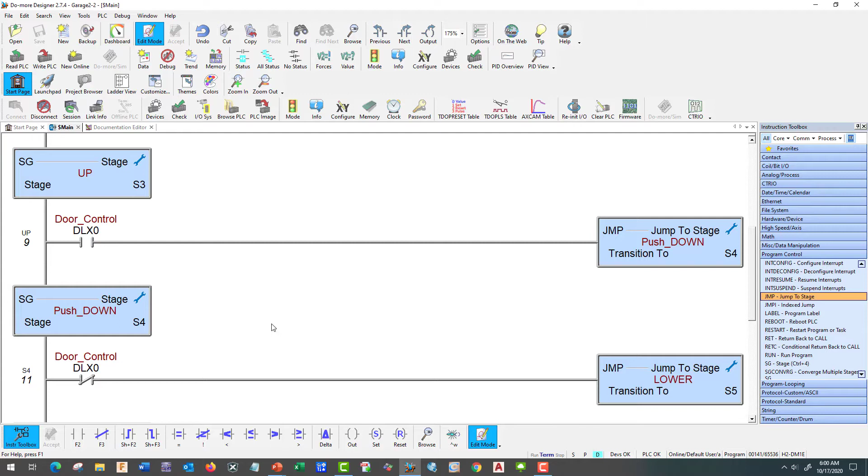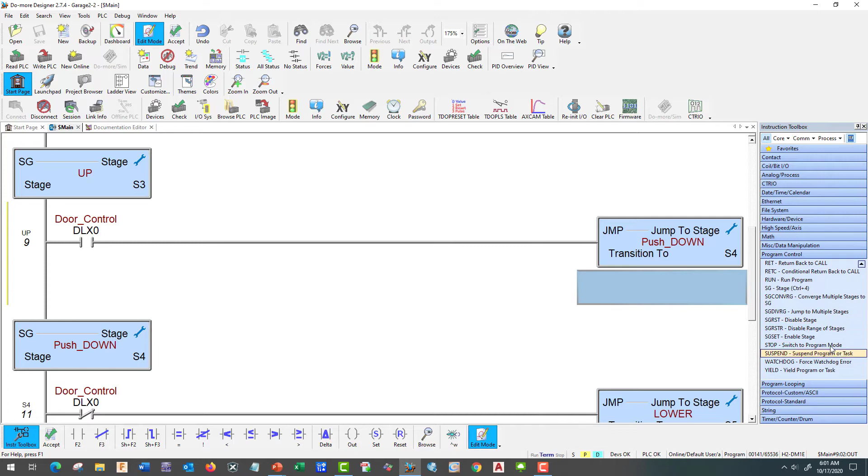And we want to add a safety light. So we're going to go right under here. So let's go here and we're going to go to Edit, Insert, and let's send a row after the cursor. So let's do an enable stage because we want this to stay on until we tell it otherwise. Enable stage, here we go, and we're going to enable stage 6, which should be our light, and it is. Control up, and that's done.

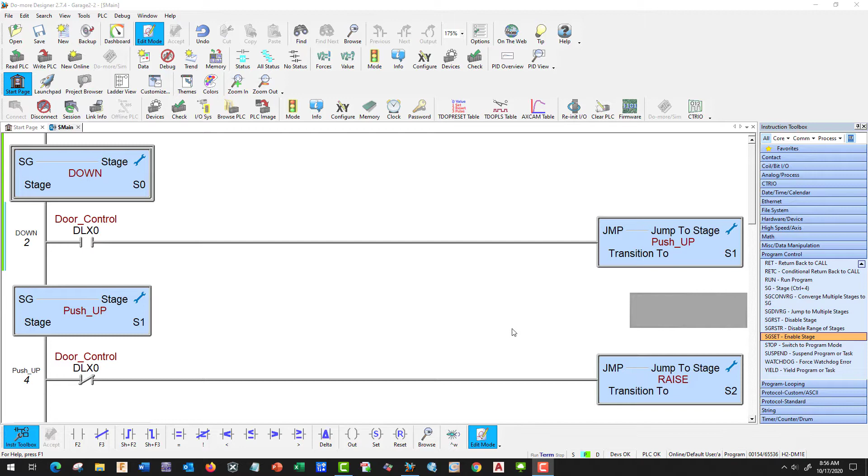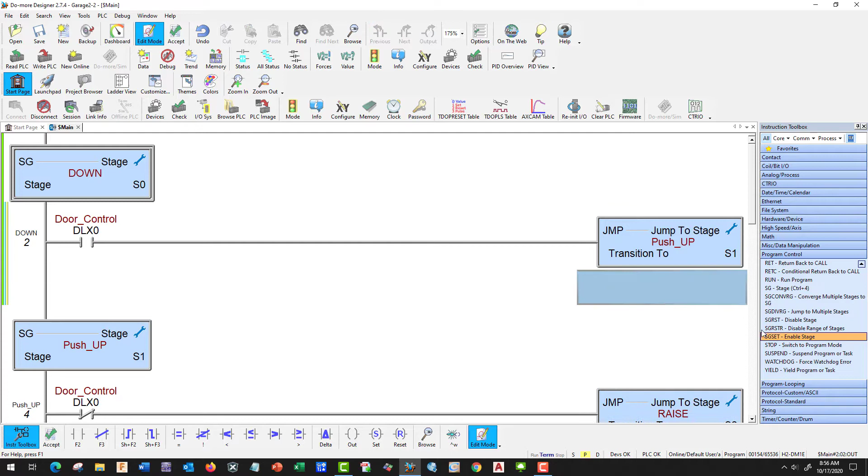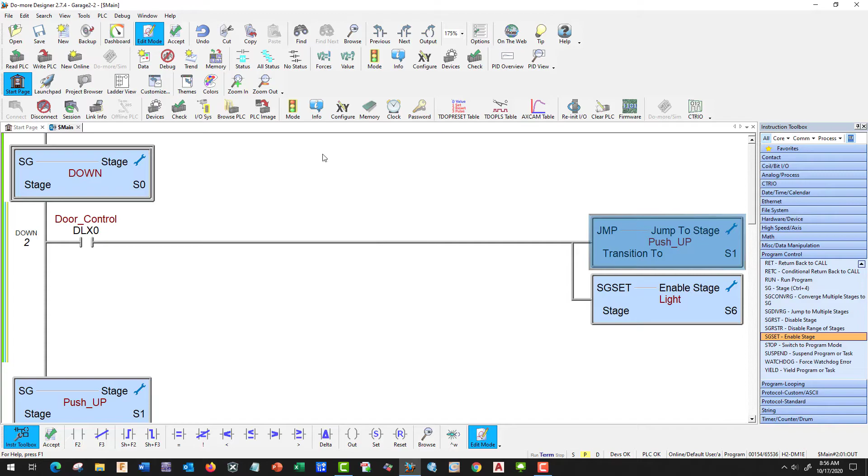Okay, let's go ahead and add our safety light to our down. So we're going to edit, insert, row after cursor. And we're going to do an enable stage, and we're going to enable 6. So we're going to enable our light. And control up, and that looks good. We don't need to add a stage 6 because once we put this in, it automatically included it.

And let's go ahead and turn our light on. That's going to be a DLY3 safety lamp. Good. And again, we have a powered rail as long as it's under the stage, so we don't need another control.

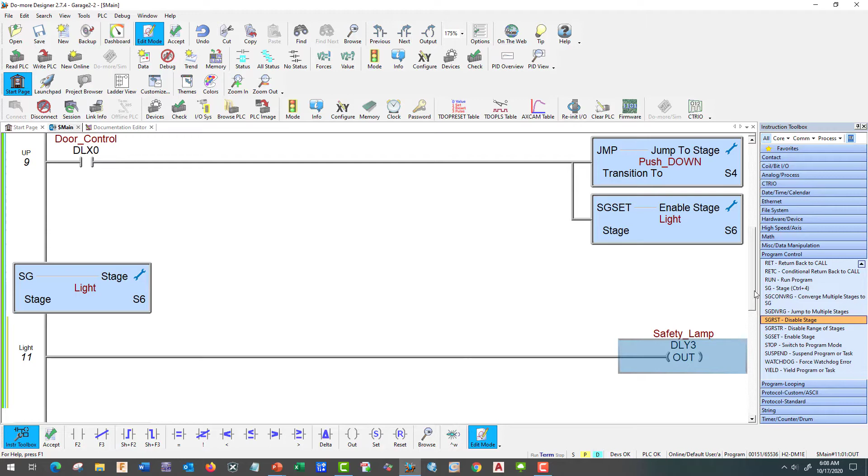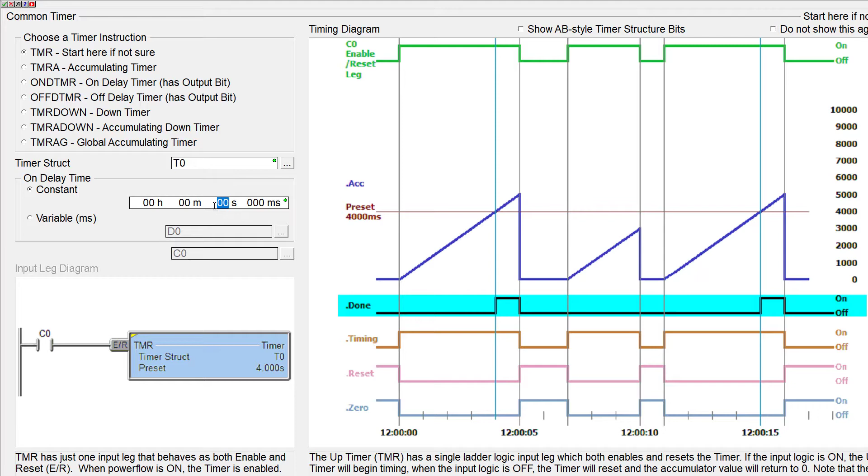And we're going to add a timer, so we're going to need to edit, insert, row after. We're going to put a timer in there, so let's go down to timer counter drum. And we're going to call this T0, and it says 20 seconds, but we're going to do it 5 so we don't have to wait so long. Good. And let's do a control up.

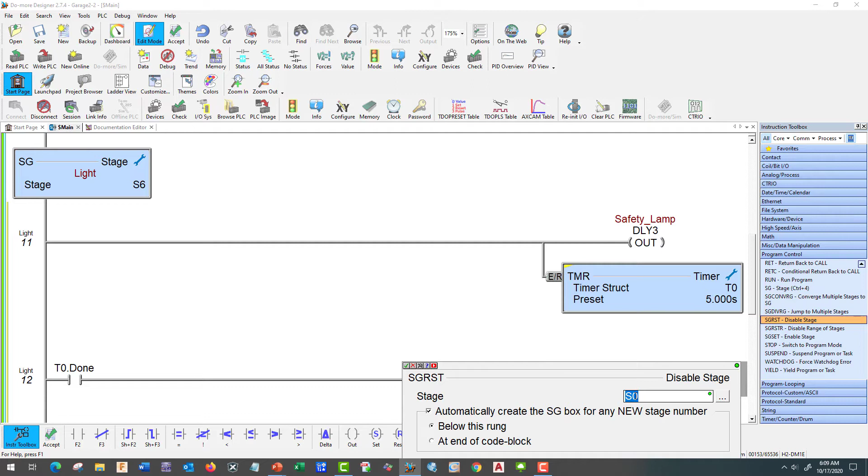And let's go down. Let's insert a rung. Edit, insert, rung, after cursor. Good. And we're going to put a T0 done here, so when our timer times out, done, we are going to turn off our light. So we're going to do a disable, so we need to go back on program control, and we're going to disable stage, reset, and we're going to reset S6. So after 5 seconds, it's going to turn our light off. And that looks like it.

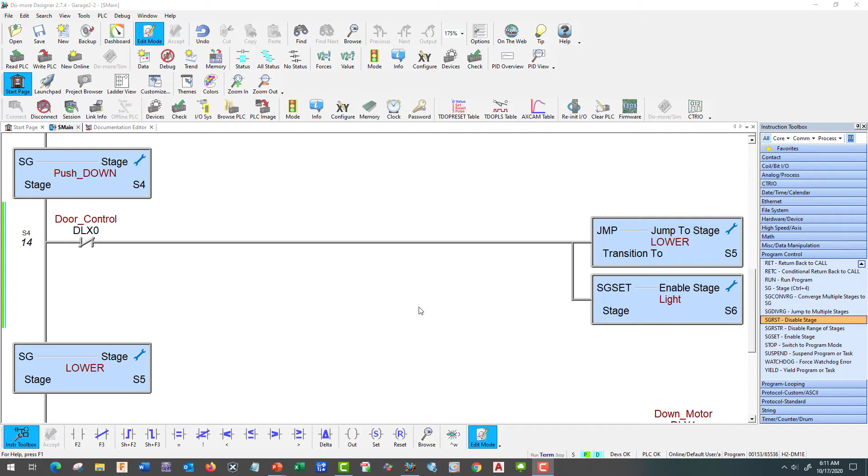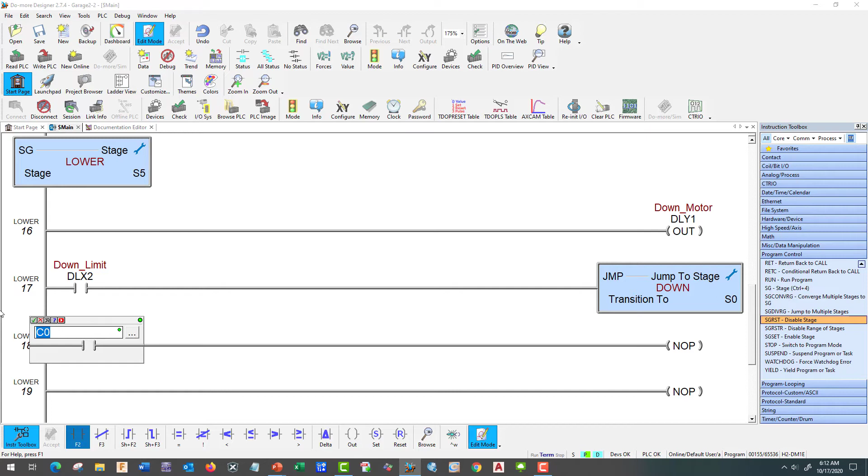So the next modification it wants us to do is add a safety switch for the obstruction sensor. So we're going to go to stage 5. And it wants us to, let's see here, what do we need to do? Stage 5. We have down. And if we hit an obstruction, which is DLX3, and it is, and we're going to jump back to stage 2.

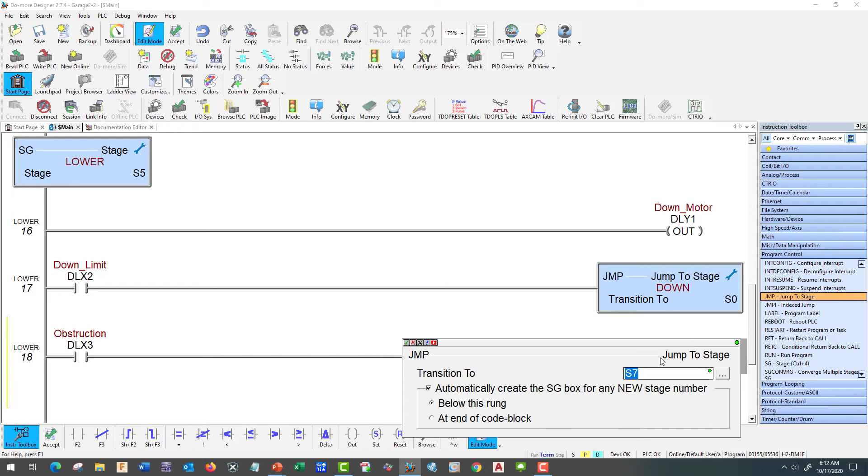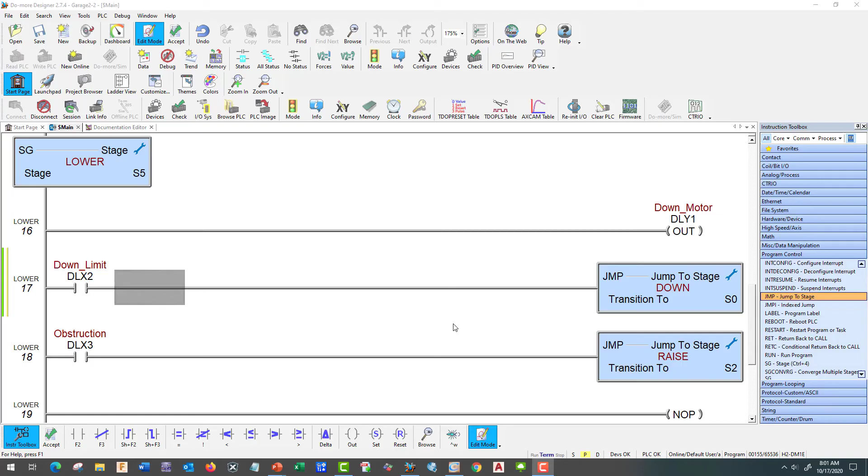So we're going to jump to stage, and we're going to go back to stage 2. So we're going to go back to raise. So when it's coming down and we get an obstruction, we want it to go back up. And I need to add one more thing. I need to add a normally closed obstruction here to the line above it.

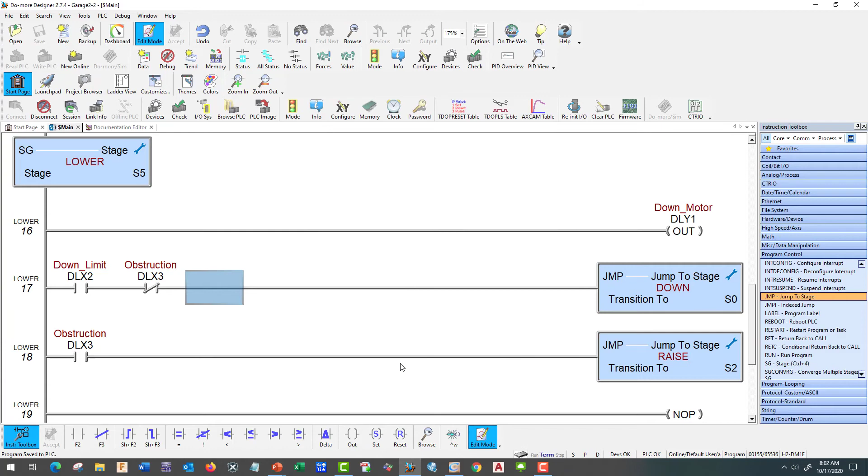And that looks good. So let's accept, save, write it to the PLC, and put it in run mode, and status, and let's go ahead and test it. Okay, let's test it. So here's our button, and we're going up, and the light's on, and once we hit the limit, it turns off.

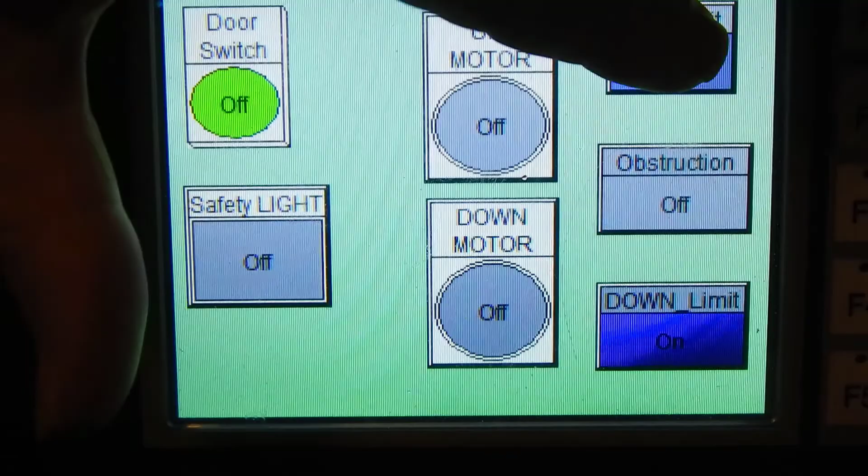Let's go down, the light's on, hit the bottom limit, let's go back up, hit the limit, light's off. Let's go ahead and go back down, and let's hit an obstruction, and it goes back up. It's working perfectly.